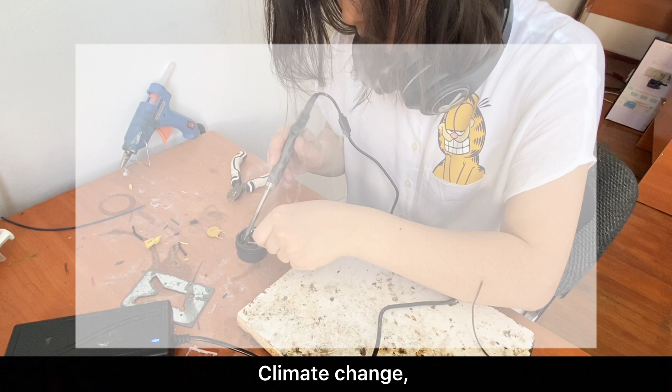Water is a daily necessary resource for economic development, health, life, and ecosystems all over the world. Climate change, droughts, water shortages, and population growth are increasing the strain on existing water resources, thereby increasing the necessity to preserve and avoid water wastage.

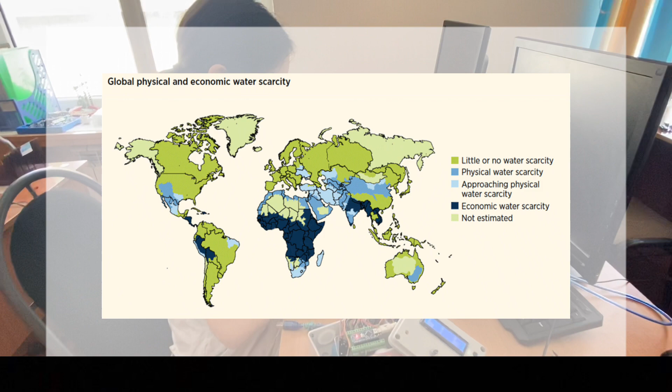From the interview with Mark Ashebayev, Doctor of Technical Sciences, we conclude that the most vulnerable and poorest country in Central Asia for water scarcity is Kazakhstan. By 2050, Kazakhstan's level of drinking water deficit can increase threefold if appropriate measures aren't taken, says water columnist Kunduz Adilbekova in her article written specifically for CABAR.asia.

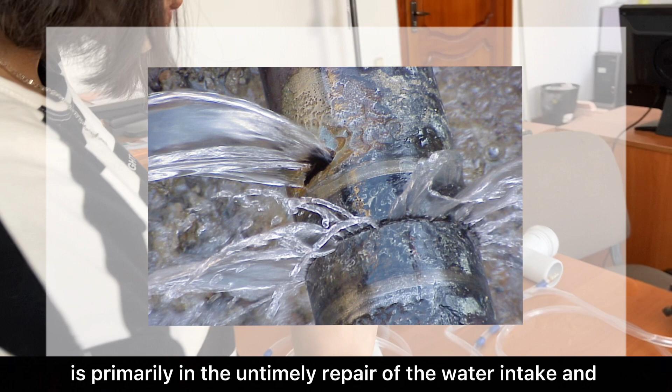One of the main reasons for the shortage of drinking water in Kazakhstan is primarily the untimely repair of the water intake and the absence of an innovative approach during the construction of the underground water pipe system. Due to the old methods of building pipes, water leakage isn't detected or is poorly detected. Weak water pressure and huge inconvenience during its use are the typical cases we see every day. People are not aware of the true reasons why they cannot fully utilize the water.

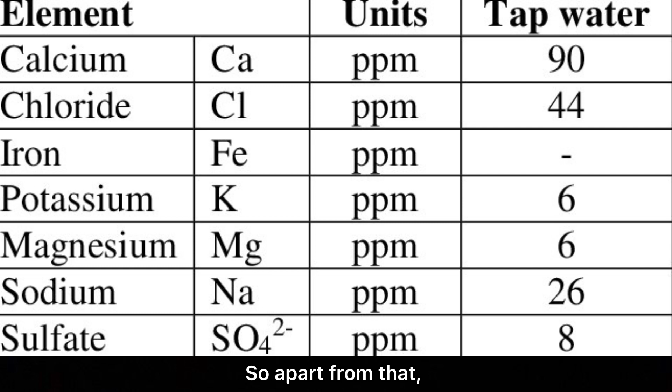Apart from that, the water in pipes contains chlorine, boron, and arsenic, and chlorinated drinking water may kill a number of microorganisms in the soil or a compost pile, damage parts of plants, and significantly reduce soil fertility.

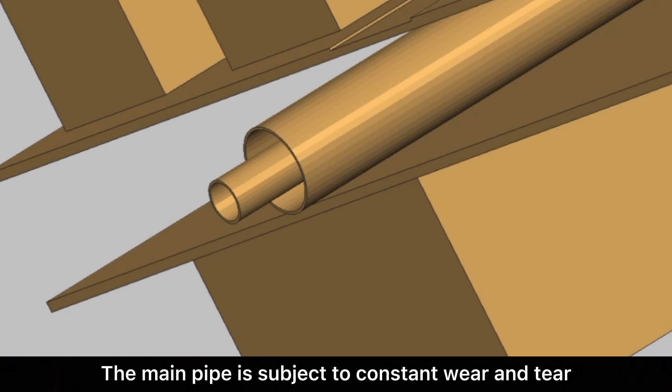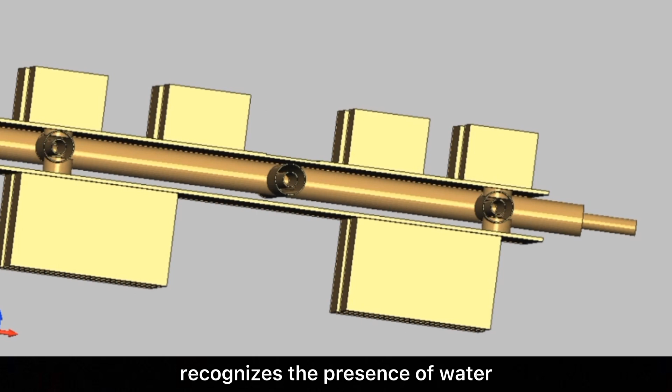The pipe system is composed of inner and outer pipes. The main pipe is subject to constant wear and tear and water leakage. The outer pipe has the function of intercepting water to ensure the safety of water resources. When the inner pipe leaks, the water level sensor in the outer pipe recognizes the presence of water at this level, then notifies of the leakage, thereby ensuring timely repair.

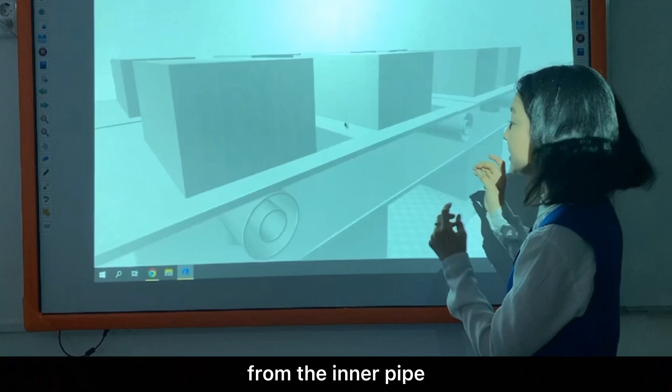So, we figured out how it is detected and notified, but where does the water go, and how is it disposed of after a water leak? When the water leaks from the inner pipe, it goes into a special reservoir, and then the water inside the reservoir is pumped out by the diaphragm pump into the inner pipe. To prevent water leakage from the inner pipe, we have a special device called a water valve.

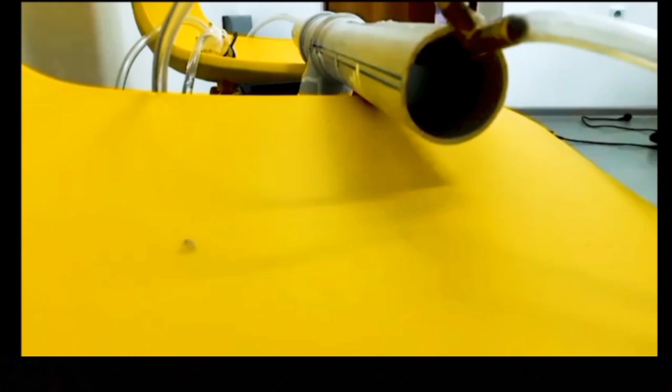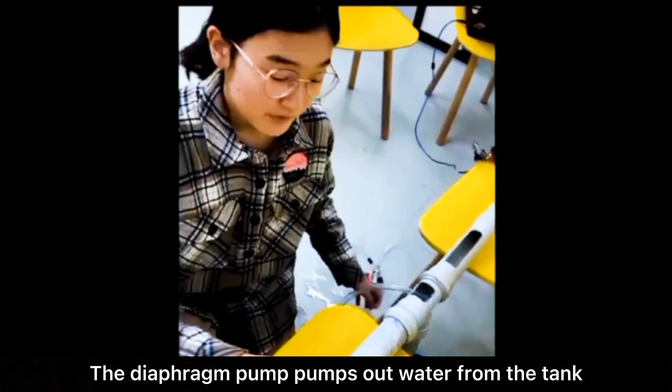There is a water level sensor here, which was programmed on the Arduino microcontroller, and in the case of water ingress, a piezo element is connected, notifying of the leak. The piezo element simulates leakage monitoring. Instead of piezo elements, a GSM module, Ethernet, and GNSS can be installed in our system to connect the controller to the server.